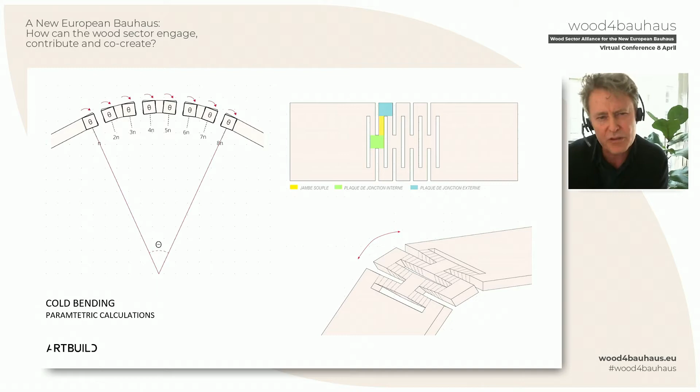When you look at these elements very closely, you realize that there is actually a particular engineering calculation to be done on each one of those torsion modules of wood. If you can find the right parametric calculation, you can apply that to different types of wood and different scales of CLT panels. And that's what we started to do. We started to find out where we could find the tools to do this with CLT panels.

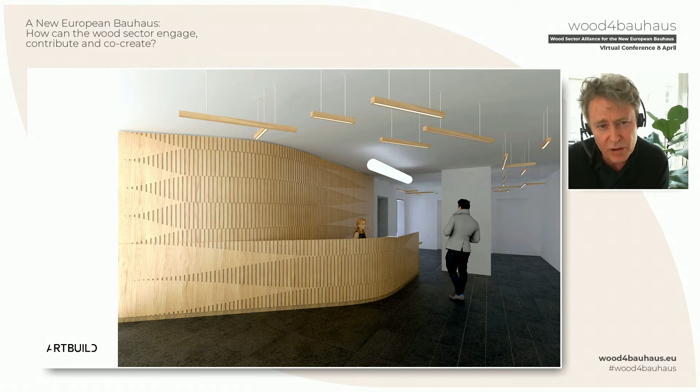So this is not plywood and small woods. These are big CLT panels. These are floor slabs and load-bearing structures. That was quite successful. We began to find that there was a nice balance between 6 centimeter thick panels and the parametric tunings. We did our first experiment, which was in fact the welcome structure in this building, which you saw, which was handed over in 2017. But we thought, okay, now get this bigger, get this scaled up.

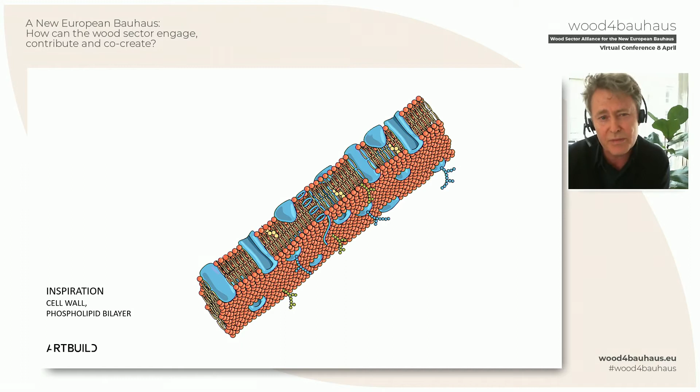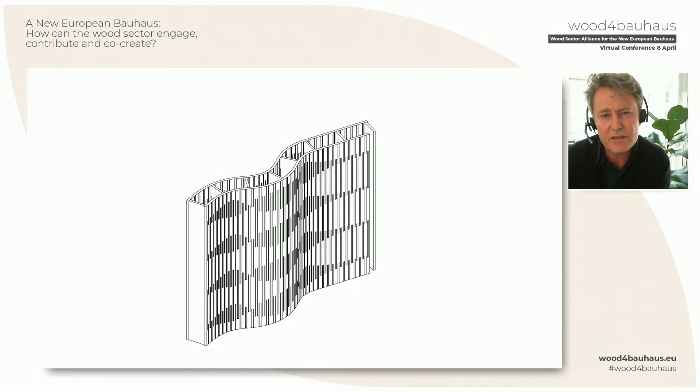To look at structural systems, what can we do once we've got that curved CLT panels? We went back to nature and we found a double wall structure. Rather than a simple load-bearing element, we started to combine these 6 centimeter panels, and with the precision of our numerical tools and our calculations, we started to make these walls, which, being cut in a particular way, according to this parametric tool, could make us some wonderful load-bearing elements with an awful lot of freedom from a plastic point of view of what we can actually do to make things which are totally,

totally different. Hollow cavity, so you can carry fluids, you can put insulation in, you can put thermal inertia, and we came up with a whole new constructive system, or at least we thought. Then we were looking for opportunities to what to do next with this structure, how to then take this beyond.

And I'm afraid I can't see, this is such a small thing on my screen, and I can't even read what that is on the slide. So somebody could please pull up the screen, that would be really helpful. There we go, thank you. That's wonderful. That's great.

Okay, so this is just a recap. What's interesting in this lattice hinge kerfing approach? This is reversible bending. So basically, you're taking your elements, you're slicing them up, you can flat pack them again. That makes for flat, efficient transportation. The digital tools give you an incredible engineering flexibility in terms of what you can do and how you can recompose these elements and put them together again. Custom bending, that means you can pretty much design them to any shape that you want.

There is this upcycling, so we're back to some of these words that we heard together today, the cascade, which I also think is a lovely term. And then you've got the acoustic, biophilic, and aesthetic qualities of timber. So you're combining a bunch of qualities of timber all together, and you're addressing this problem of reducing the redundancy of the buildings.

We were then commissioned to design a welcome pavilion for the agricultural fair in the Walloon region of Belgium. And we thought, well, let's use the CLT bending process. And we started to think, well, what in nature can we be inspired by in order to come up with a constructive system which is going to give us the particular form or the particular use that we're looking for? We looked at slow growth patterns.

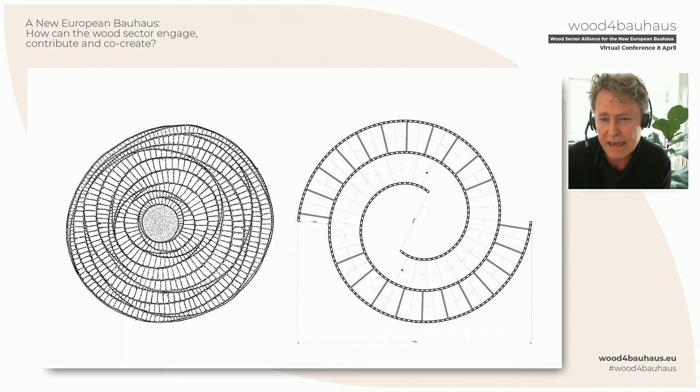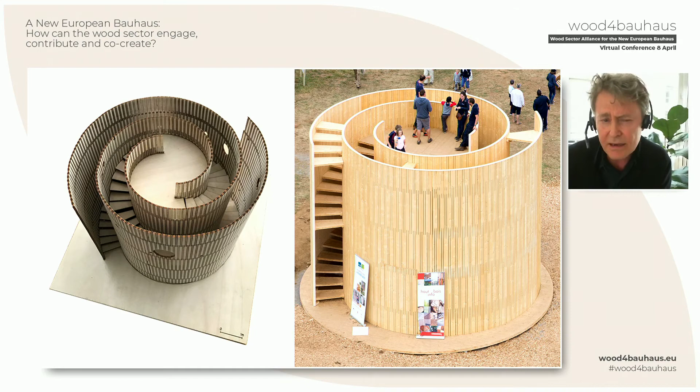So as we look closer at the section through the banana, we begin to understand how the whole thing works together. We start modeling that up using our CLT 6 centimeter panels, and how we're going to cut them in order to form those concentric spirals. We start doing our first real wooden models. And then that's the thing once it's built. So obviously I'm jumping through some steps very fast, but that was the welcome pavilion in its final state.

That's Sasha. She is our parametric priestess. She's the one who did all the coding for this. And you can see her soaking up the biophilic elements of the wood. I also heard this wonderful term, acoustics, the Helmholtz resonator. I think this is one big Helmholtz resonator that we built here.

But it was just magnificent, because this is when architecture comes back and tells you how beautiful simple things can be. These basic construction elements, CLT, this is unsanded CLT. It's just been cut with a circular saw, and it makes for these cathedral-like spaces. It's absolutely gorgeous. So we were convinced that we could then go on and do even more things with this. This is the opening ceremony. In fact, it was rather like a musical instrument rather than the musical instruments being on the outside.

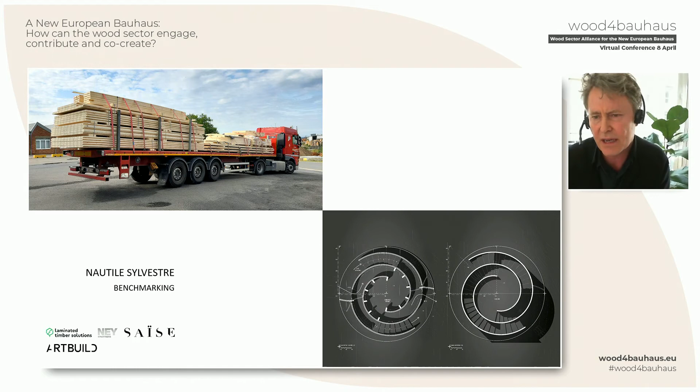We did some benchmarking on this. That's the entire pavilion being transported. So that's the flat pack element. Then we're trying to find out how structurally we're able to compare with simple post and beam and wooden frame, stud frame structures. So we need to do that homework as well. That's in progress at the moment. But then, of course, this commission came for the subject of today's talk. So I'm just going to go to that very quickly.

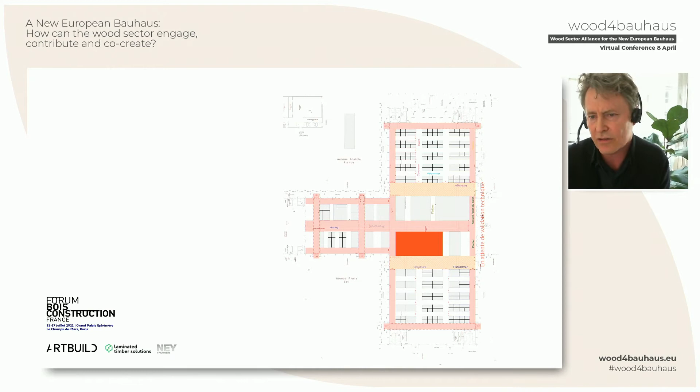This is the Grand Palais éphémère. This is where the Forum Bois Construction, one of the biggest meetups of the timber industry in Europe, happens. This will be happening this summer. And this is where we were asked to do the temporary amphitheater, which is sort of like the heart and soul. This is where all of the exchanges are made and all the speakers do their talks. And that was basically the rectangle that we were given.

We had a look at how we could basically provide a structure which would give us the acoustic comfort and the protection from all of what's going on around, the noise of the fair going on around. And we came up with the conception of this rectangle using a series of curved panels.

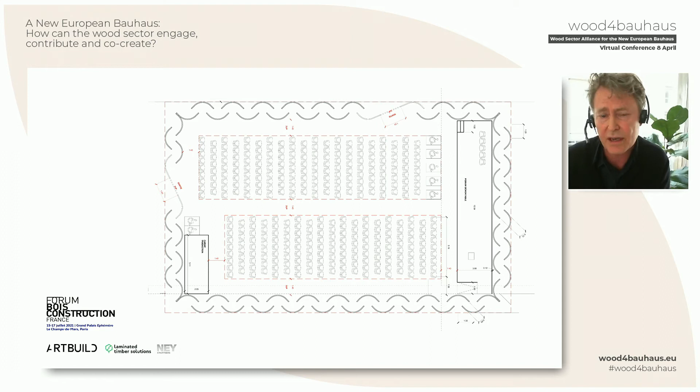The next question was, how big should the curved panels be and how will they stand up? Because we're obviously not going to be using the banana stem configuration. We have to find something else. When we look at the panels all standing up to make the rectangle, that's what it starts to look like. It's rather like a curtain in wood, but this is 6 centimeter CLT. How do we get all of that to stand up?

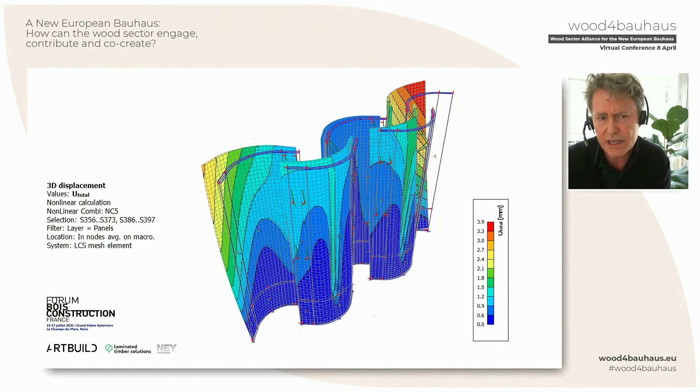Well, then we go back to our engineers, NEY, the Belgian engineers. They're a wonderful, wonderful firm, extremely good with timber. How do we get all this to stand up? Well, we went back to nature again. This is how the panels would perform if you just sort of hold them on the ground and then let them go. So this is all the pre-engineering work that we're looking at in order to calculate what to do.

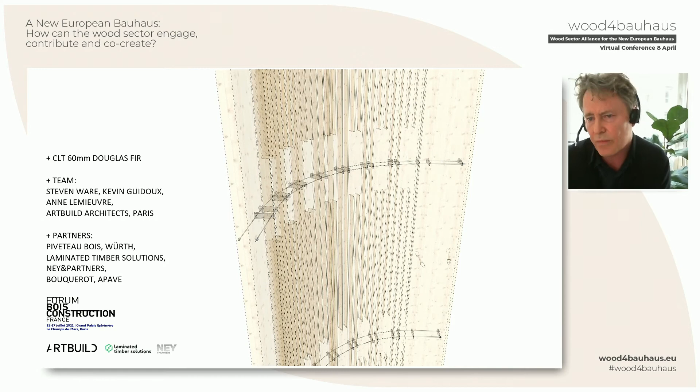We looked at another system which you find in nature, which is bird bones. Very, very light, very, very strong. Not the concentric circle model that we saw a bit earlier, which is more of the human bone thing, which is made to carry weight. Bird bones, when we looked at them closer, we found a whole bunch of different structural approaches, and we started to apply those.

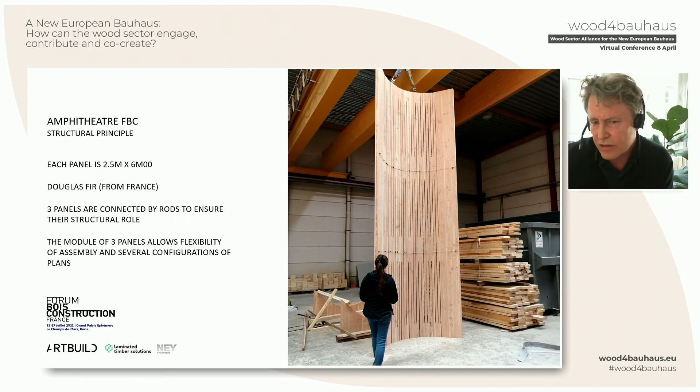This is our first test using metal rods in order to hold the panels in place. These are 6 meters high. This is all in locally sourced Douglas fir from Piveteau. That's what the inside of a bird bone looks like. And this is how we're starting to combine all of the elements of curved CLT panels in order to get them to work as structural columns in sets of 3.

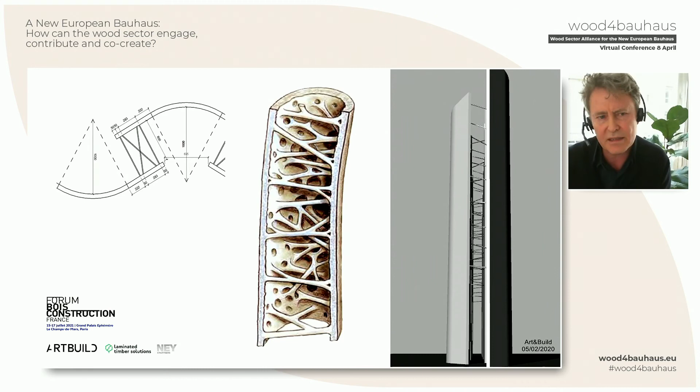So when we stand them up, that's how they look. They can resist the wind loads, they can reduce any impacts that they may be subjected to during the course of the fair. That's looking at sort of a down section, looking at how they're all put together. And this is basically what the amphitheater is going to look like if you are able to come, and let's hope that everybody's able to be mobile again this summer. This is what it'll look like in the Grand Palais éphémère this summer once it's constructed.

So all of these elements are now being assembled right now in the workshops, and they'll be transported to site. They'll be bent on site and then pinned together on site. What's going to become of this temporary pavilion? Because once again, we're building to disassemble. Well, it's going to be shipped off and right now it's being studied as a food hall. It's going to become a food hall somewhere on the outskirts of Rennes, let's hope.

But again, there are more barriers to do with all of this than just simply engineering. There are also questions of insurance companies who say, well, I don't want used elements. And I think that as we start to develop more and more approaches which integrate circular economy principles, the more we're going to have to deal with another set of barriers. We've dealt with the termites, with the fire, with the seismic things. Now we're going to have to deal with a whole bunch of other elements, which is, can we reuse all of these elements in a structural way and satisfy our clients who are taking on something which has already had a previous life? But we're absolutely committed to going all the way with that.

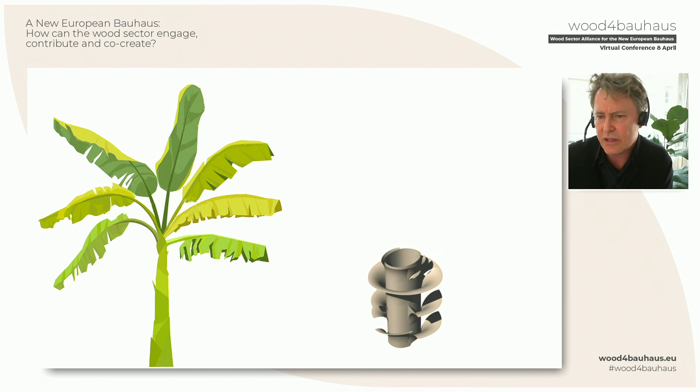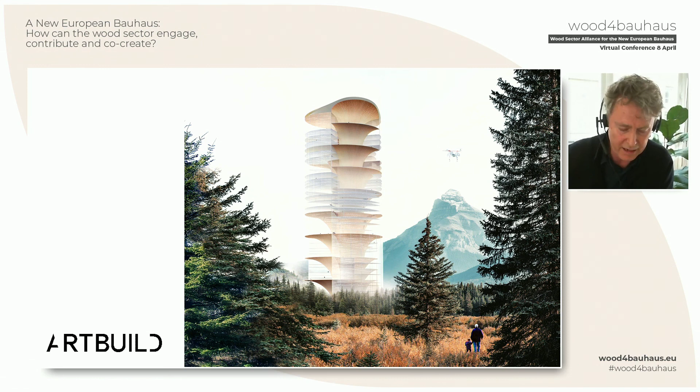So this Musa project, this research project, which you've now seen some of the flowers that have come out of, has really become for the office almost an existential idea. Where should we be going with constructing? Should we be building things? Or should we be completely rethinking the way in which we inhabit the planet? Should we be aspiring to leave the ground, to build high, not to reach the skies, but to release the ground to other species who need to be on the ground?

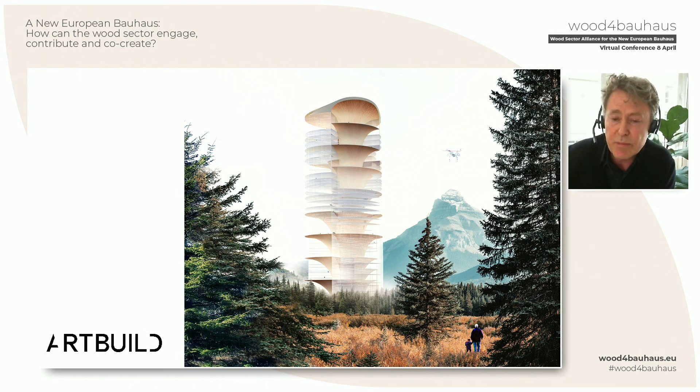Should we be living in structures which offer us more than just a view to the exterior? And should we be borrowing more materials from nature and geological cycles and using them for our own purposes and then releasing them back to nature? How do we do that? And can we imagine streamlined manufacturing flows using cold processes, which is what nature uses as well, or body temperature at the very most, just as our cells manufacture molecules which build the building blocks of life themselves. So this is where we're going with the Musa project, and perhaps one day we'll be able to do much more ambitious things with this technique.